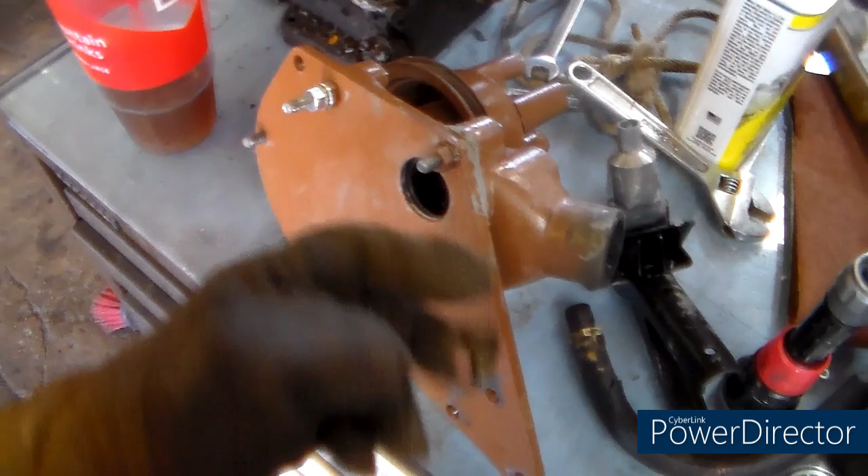302 Super. Last video we were talking about issues with the water pump, and the new casting doesn't line up with the hole exactly right. If I would have realized that before I had this thing all put together, I maybe would have got a die grinder or something and relieved that casting a little bit.

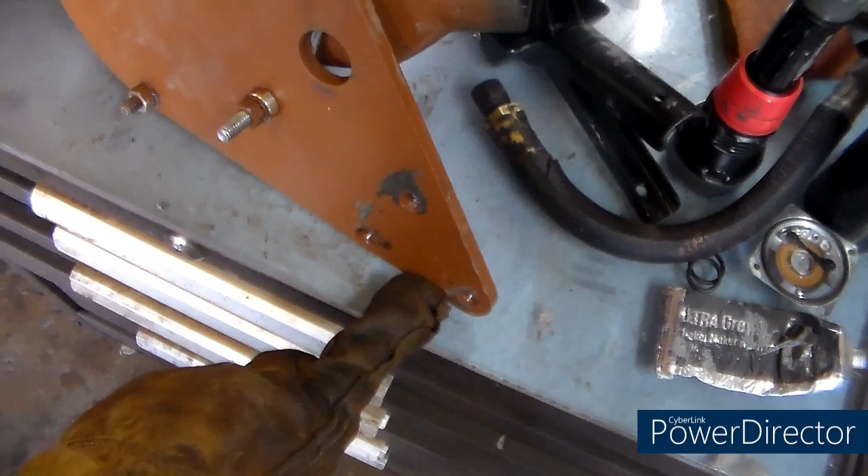I talked about potentially spacing, putting some spacers down here where it mounts the front of the motor to move that out. I don't really like that idea. I want this bolted up solid. Parts book doesn't show any kind of spacer. I know one of the parts suppliers said there's supposed to be one. I haven't seen any indication other than their word, not saying he's making that up. Just the parts book I've got and everybody I've talked to that's got 302s, that one guy's the only guy that says there should be a spacer there.

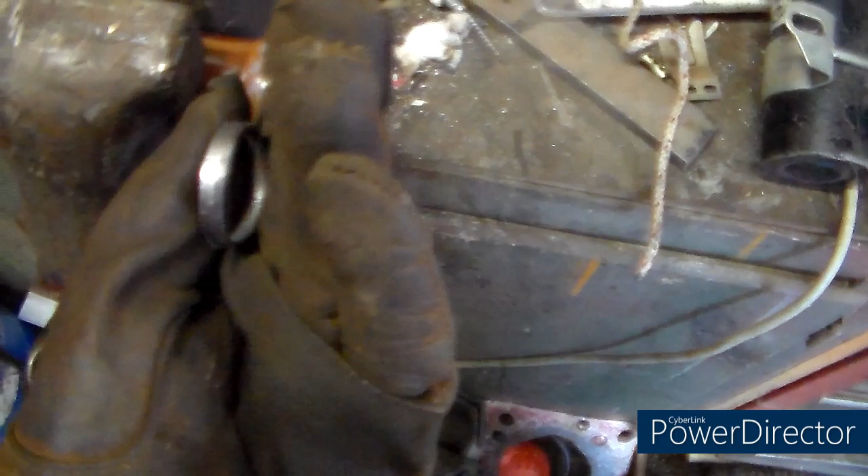So I went a slightly more drastic route. We're going to just shorten the pipe a little bit. I'm going to go grab my 4 or 5 inch belt disc sander combo thing out of my storage, and we will square the end of that off, and then also put that chamfer on there, so that squaring it up should help clean up the burrs, and hopefully that'll slide in nice and pretty, and we'll be able to get this thing back together.

But I am going to put my spacers there on the 3 holes or wherever... yeah, that other plate over there, where'd it go? I've lost it, I'm losing my mind. Yeah, this plate here, I am going to shim that out to hold the air cleaner out like I had.

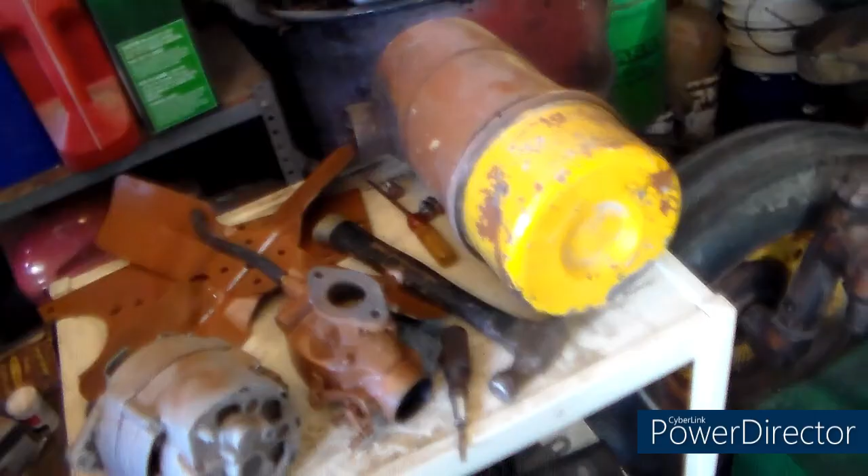So anyway, that's where I'm at for now. I had to run to my storage building and find my sander so we can get that cleaned up. It's either that or can I get to my big one? Nope, I got to do some more cleaning and rearranging out here,

Except for the toys up there that got lent to a young man, and then he kind of outgrew them and they got sent back. There's a whole bunch of stuff on these 2 shelves over here that hasn't been touched since the day it got put on that shelf, I think is going to go away. I really think I'm going to get rid of those 2 shelves, get rid of all that miscellaneous crap, give myself a little more room out here in the garage. But anyway, I'm rambling on.

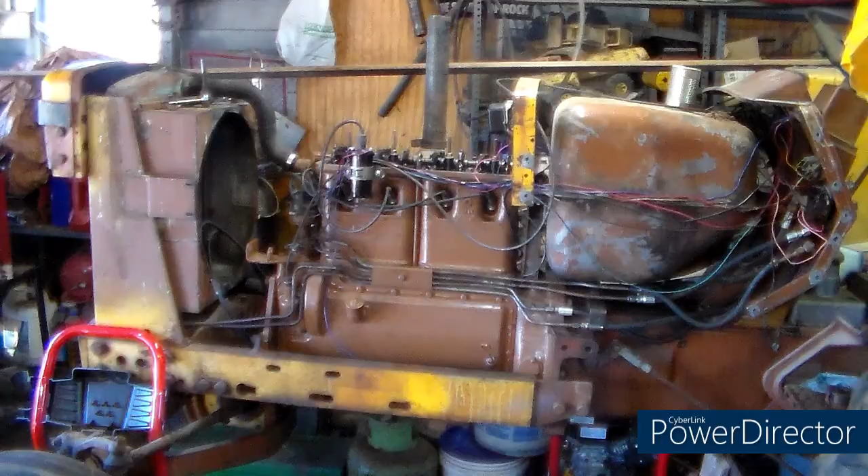So I'll be back. Alright, 302 Super. I'm going to have to take back a previous statement. I wish I had a good place to sit this down.

Oh, see, now you're going to change pages on me. I went in the house and looked at repair catalog R2097A. This is for the straight 302s, but other than some power steering and appearance changes, they're the same. I'll go to whatever page this is, like page 20, whatever it is. Right there it is.

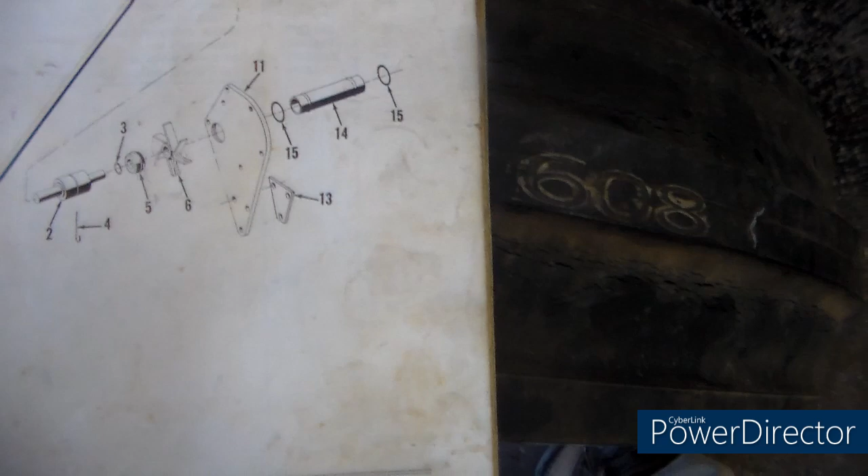There's the little spacer plate that the guy was saying is supposed to go in there, which I don't remember having. So anyway, I think I have to make or buy one of those.

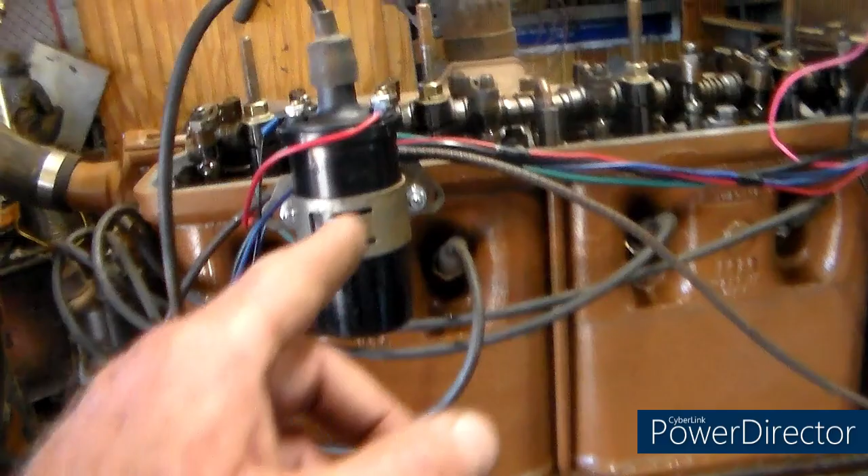And then I also need this piece right here, number 26. This is a support rod. It says the first valve cover stud, but all the ones I've seen, I think they go to this one, because that can is like right there. I think it goes to the second one. So I'm gonna have to try and find one of those as well. I mean, I know somebody's got one. I just got to figure out if that's where I want to go or not.

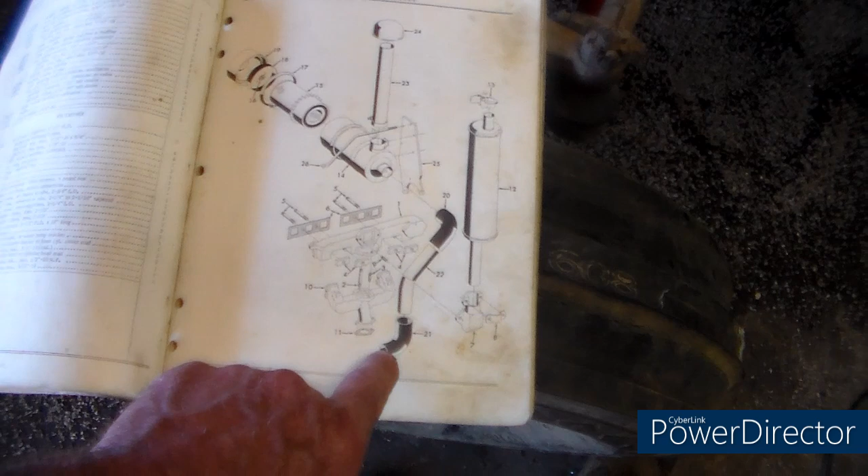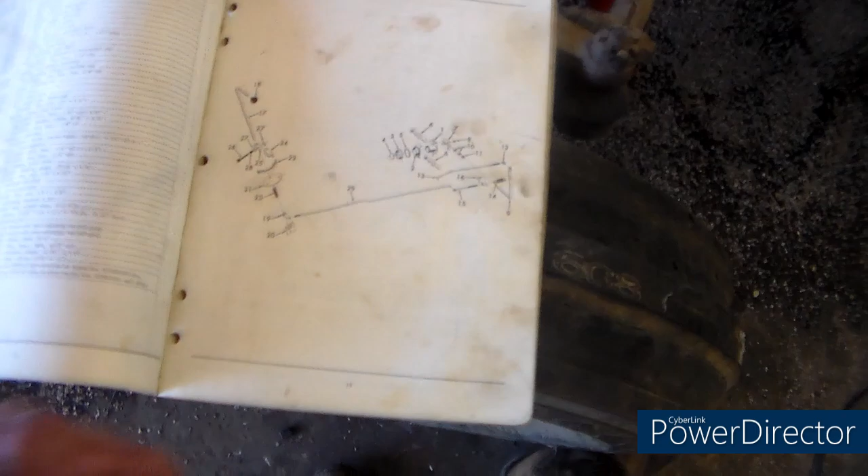So then I also need to get one of this hose, because mine, I think from the bottom end being exposed to gasoline, is just hard and it will not fit over the carburetor. So anyway: carb to pipe hose, that support rod deal, and then wherever it's at in here, I missed it, no, and then that little spacer plate.

So we may not be getting much done today, and I may have messed up by cutting that pipe off. I don't know. The good thing is there's enough length on this end that goes into the block that I can, probably what I'll do is grease the block end up with that moly coat stuff. I'll probably still go ahead and put a layer of ultra gray on that just to make sure it seals. But then once I get this all in there, I'll slide that in as far in as it'll go, so that I know that I'm in there anyway.

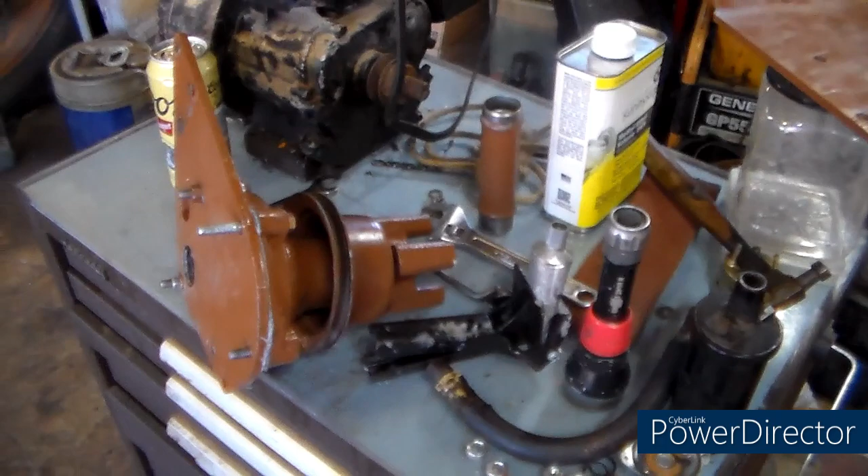I stand corrected. I'll be back. Alright, in an effort to keep moving forward on that thing, I dug through my pile of bits here on the bottom of my water cart.

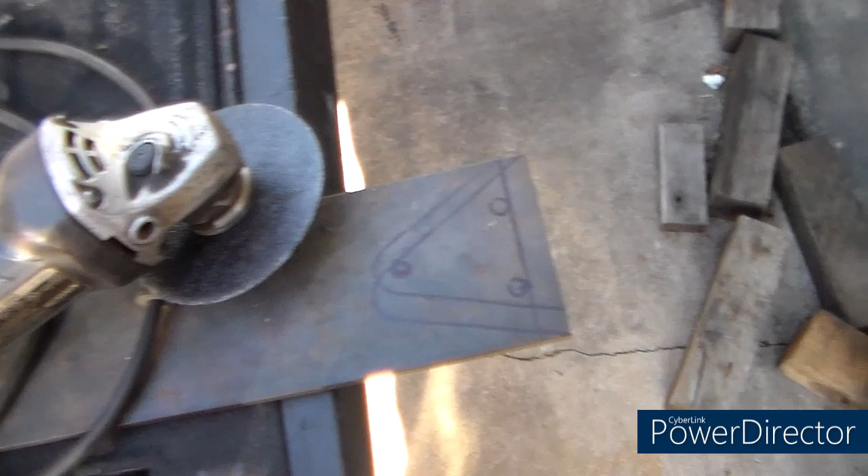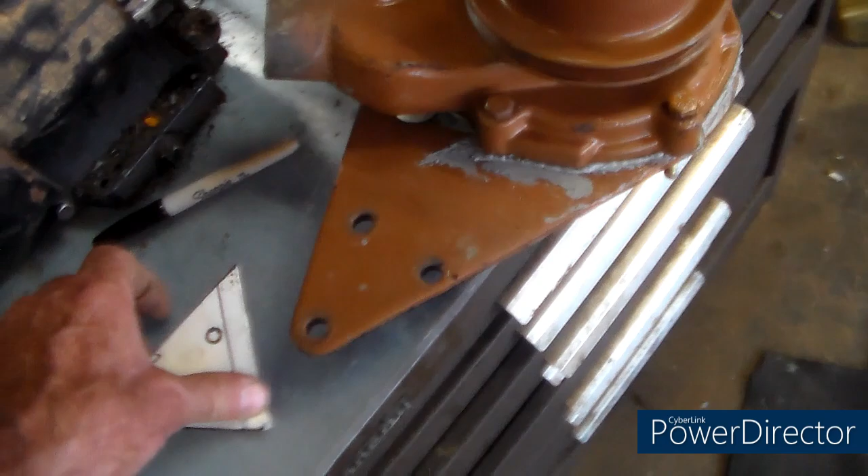Got this little thin piece of cardboard that was much easier to hold up there, mark it out, cut it out with scissors, and then transfer that onto this piece of steel that I happen to have. Don't know why I got it, don't know where it came from, don't really care. It's exactly the thickness I think I need to do what I need to do.

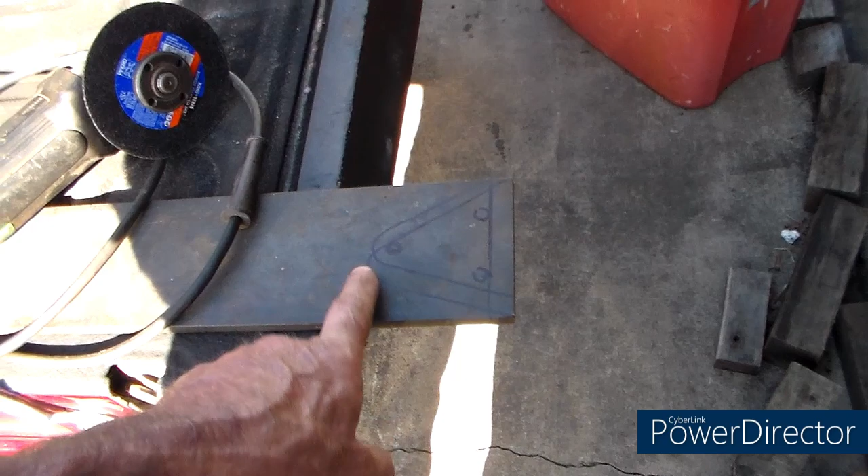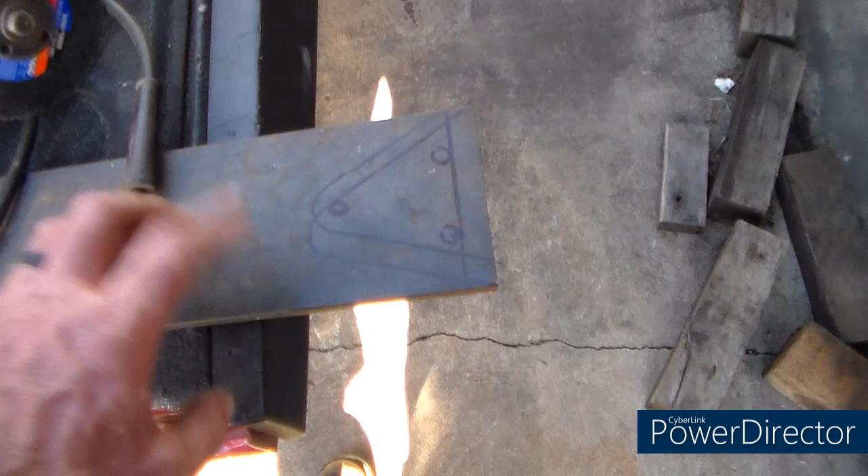So I'm gonna get ready to start wasting cutoff discs. I don't know how round that little detail is going to get, but hopefully we can at least get some. The picture in the book actually shows this being square across the end, so as long as I got enough room for the bolt hole, we'll see what happens.

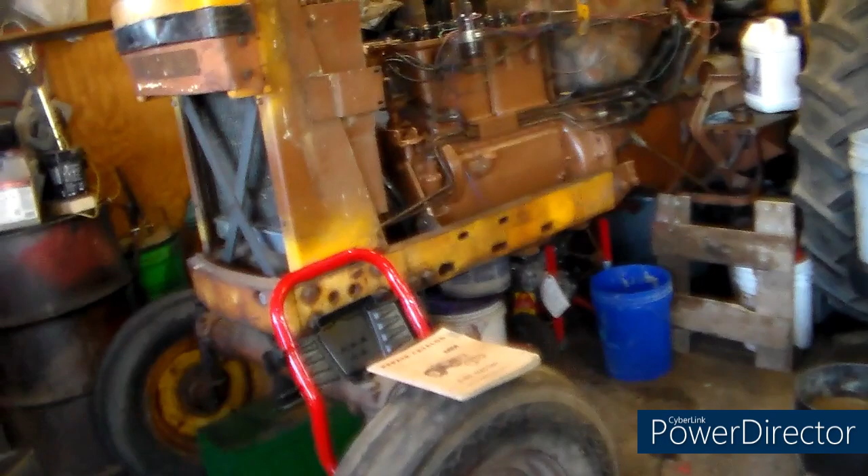What may happen, I'll just cut a straight line there and a straight line there, and wherever they intersect, that's where it gets cut off, and then we'll round it off, or put a grinding wheel in the grinder and put it in the bench vise. We'll round it. I don't know. We're gonna do something. Should have read the book sooner. Should have ordered the book sooner.

Anyhow, I'll be back. All right, back here on my portable workbench, my truck, with my portable clamps, weights and stuff.

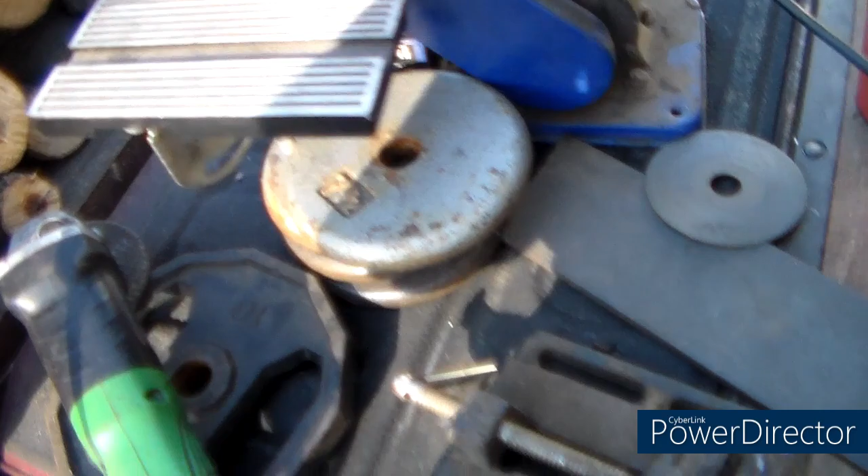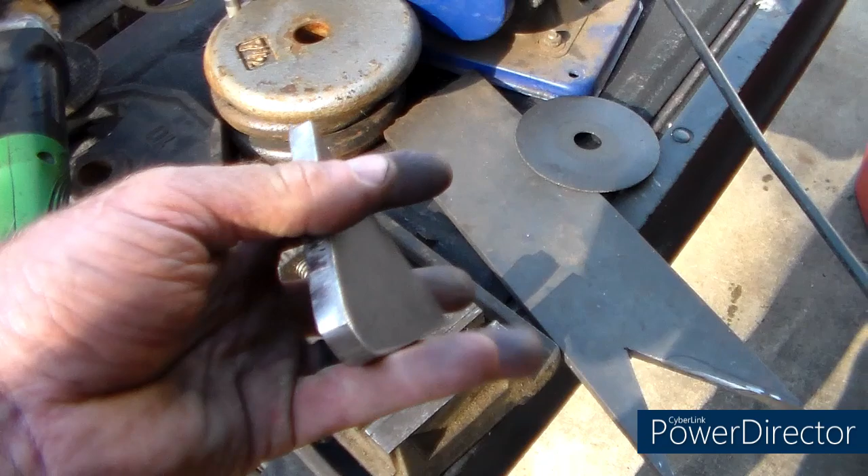I took that piece of steel and I cut a triangle out of it, and a little bit of work with the grinder and then sander and stuff. She don't look too bad. And when we take her in here to the old water pump, backwards. Fits down on there pretty good.

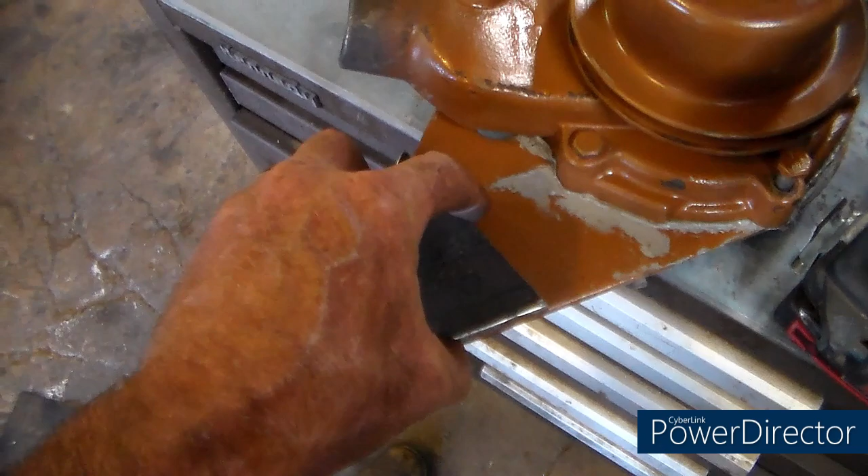So next step is I'll get it lined up real nice, and I'll clamp it on there, and then I'll use a drill bit that's just ever so slightly smaller than these holes to make some witness marks for centers of holes, and then we'll probably go over to Mr. Drill Press hiding way over there in the corner. Where is he? He's right there. We'll go over there to drill the holes out. So anyway, yeah, I'll be back.

All right, 302 update. Manual says we're supposed to have a spacer, and look at that. Well, get it framed, dummy.

So got a coat of quick dry primer on there. I kind of like it because it's kind of dark brown. So anyway, makes the brown. So we're going to coat of paint on that. That may, probably not tonight, but tomorrow we'll be able to get that bad boy right there. I think how pretty. Get that in behind that and get it on that.

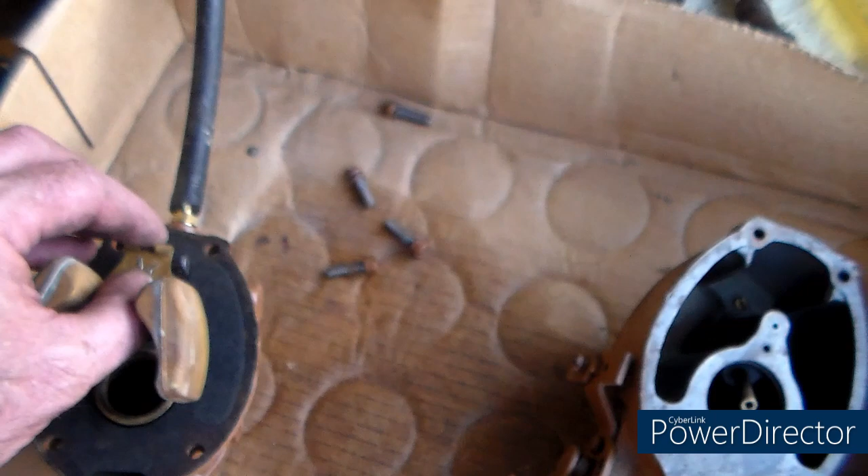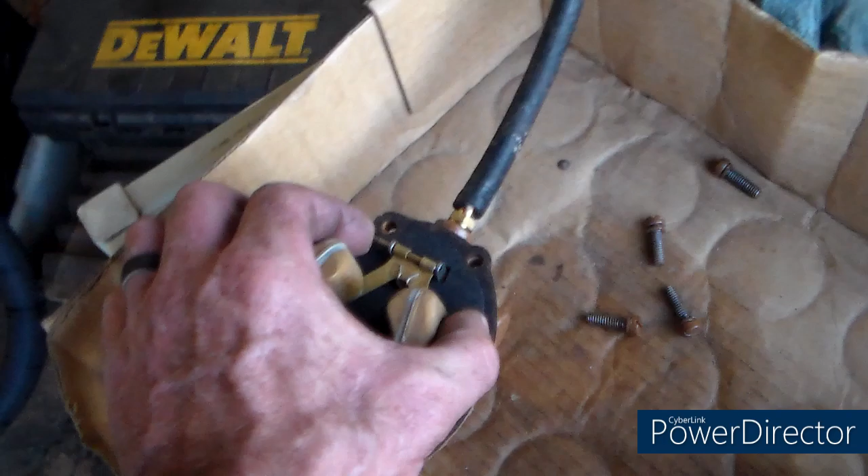I went through the carburetor because it had issues. It's got the new rubber tipped needle. Blew everything out. Everything seems to be normal. The float was going up and down nice and easy. I don't know what happened when it decided it wanted to overflow the carburetor the other night, but come on, get in. Well, why would you? You know, because you're on film, so why would you cooperate anyway?

Blowing air through the main jet. I got mist coming out everywhere I should have. So I don't think there's anything wrong with the carburetor. We're going to, there's nothing wrong with the carburetor. We hopes.

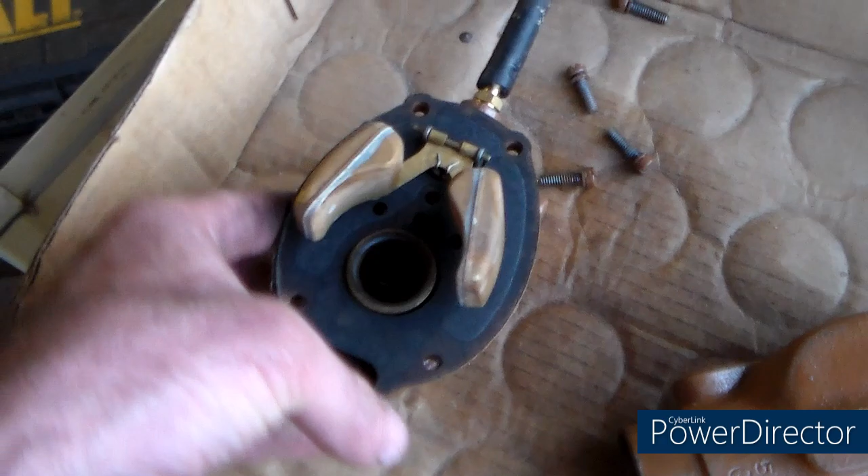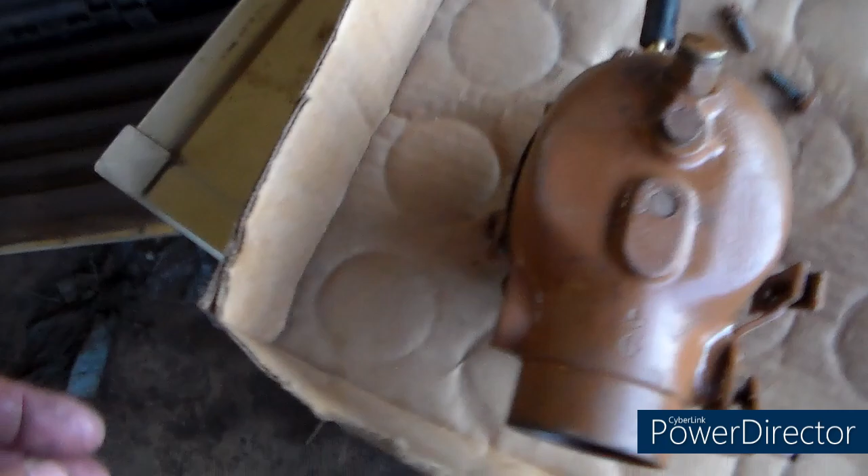That looked a little close to the witness marks. Yeah, not close enough to cause a problem though. That's how I like to put them back together. Turn them upside down and put the bottom on. Anyway, so I'll put the screws back in. That'll get all done. We might get that put back on tonight.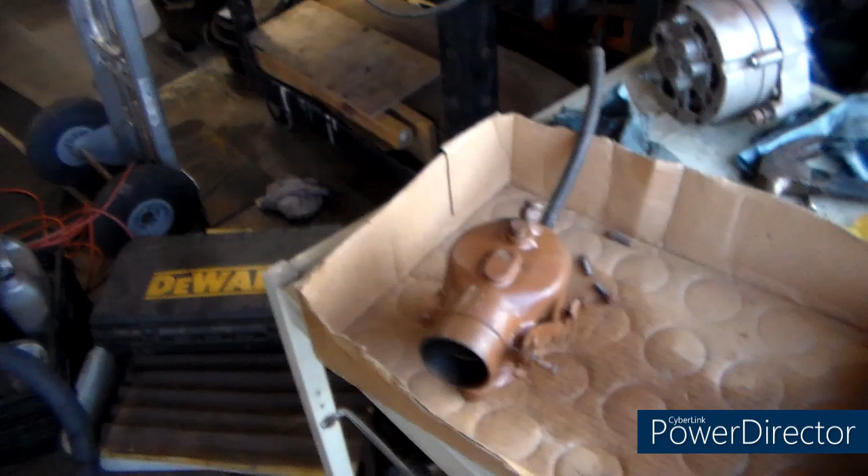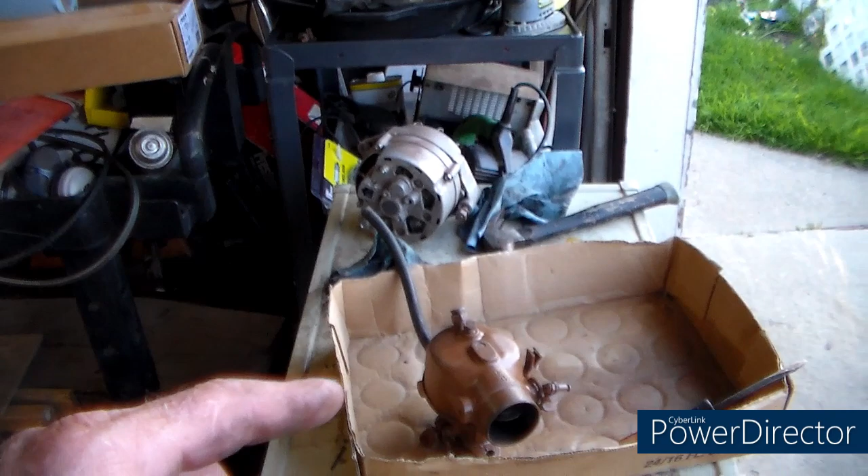So anyway, I'm going to get that cleaned back up and get it back on the tractor. Yeah, so that I can get, because I'm winding down for the night, I'm going to get that back on the tractor and then get all my carts and stuff put away.

I got some Dutch oven management I got to do. There's some oil in there, was definitely in this one from frying stuff, the fish fries. I got to get these ready to go because we're going camping next weekend, and we were requested to do chicken and dumplings in the Dutch ovens. Seems to be kind of our specialty when we go camping, and there's enough of us normally for our family. That one's enough to have enough for everybody plus leftovers.

I've never cooked in that big one, and it's way heavier than it should be. It's really, really thick. I think it's a custom made piece because it's actually got some people's names cast. I bought it in an auction. That's kind of cool with the deer on top.

And then anyhow, I gotta get my Dutch ovens cleaned up yet tonight, try to anyway. I think that's a project I can get done, but I need to get the carburetor back together, back on the tractor, and then get the rest of this mess organized, cleaned up, put back away so I can get the Jeep, Mama's Jeep, back in. Yeah, so long way to go, but we're gonna get there.

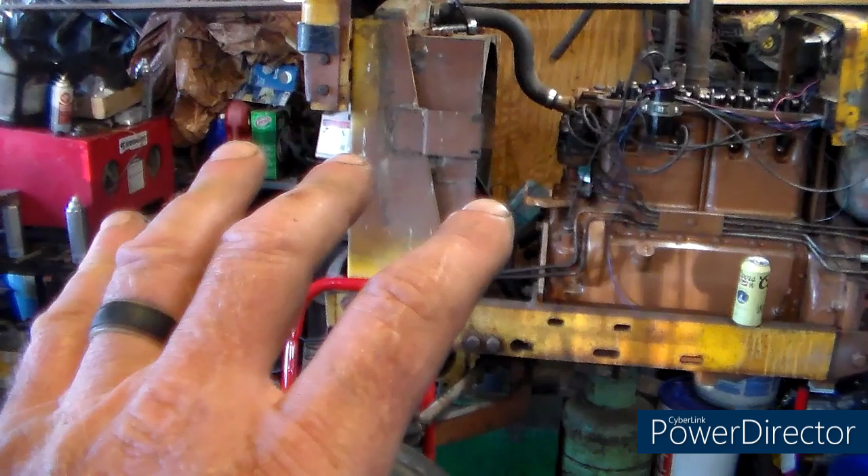Still shooting to have it at the Johnson County Tractor Show, like the 13th, 14th, 15th of June, something like that. I got about 3 weeks. Unfortunately, next week's short because camping Friday, Saturday, Sunday. But, you know, hey, we'll get there. It runs. If it leaks a little, it'll leak a little. I'm probably not gonna have the sheet metal buffed by then, but we're gonna do what we can, and yeah, I'll be back.